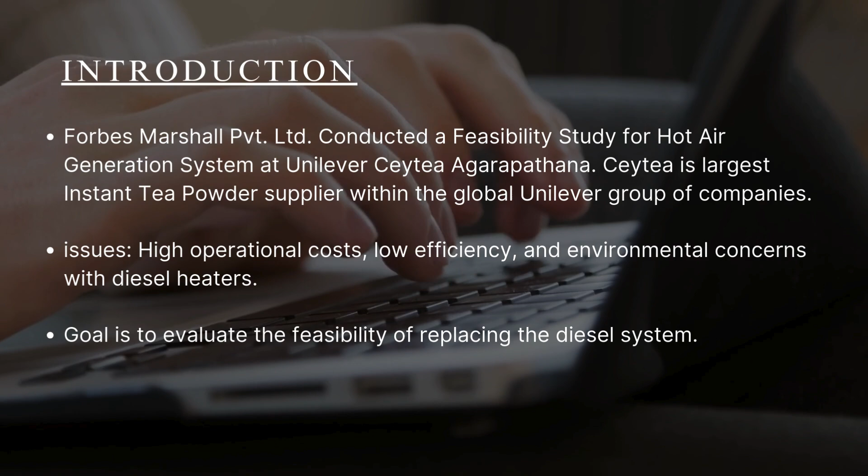to Drink, and Brisk. While their production processes are highly efficient, we have identified a major challenge in the heating system: their reliance on diesel-fired heaters. The problems with diesel-fired heaters include high operational costs due to the increasing price of diesel, inefficiencies in energy use leading to unnecessary waste, and environmental concerns, as burning diesel contributes to carbon emissions.

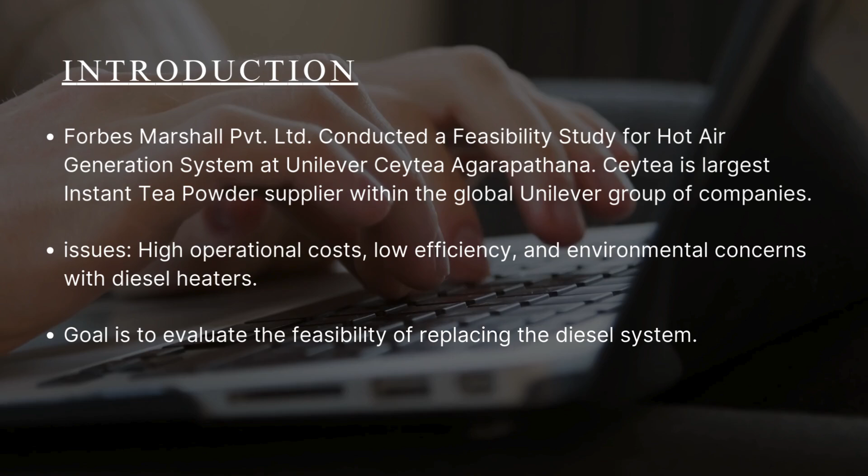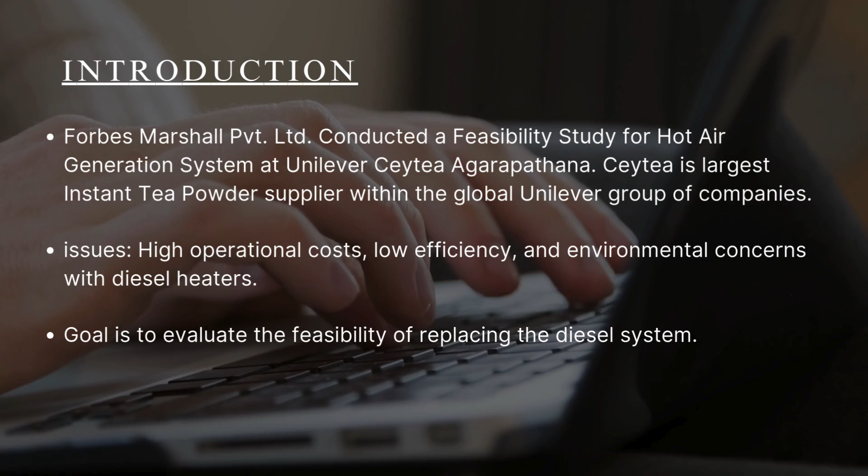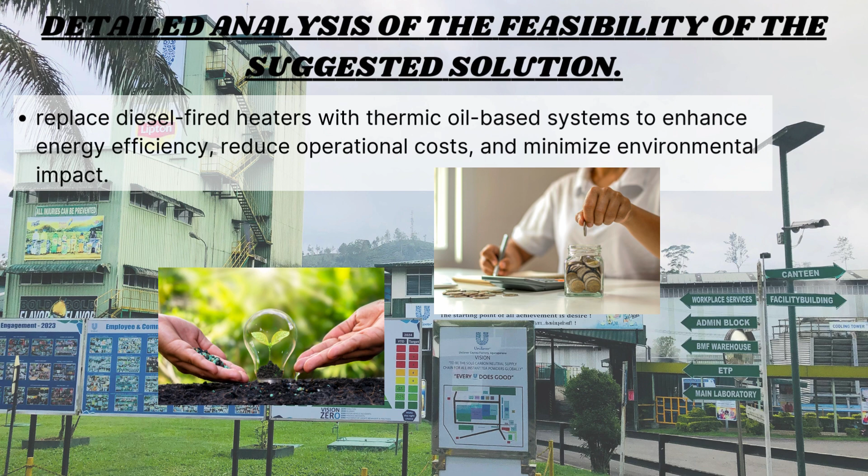To address these issues, our team conducted a detailed feasibility study to assess the potential of thermic oil-based heating systems. This alternative aims to enhance energy efficiency, lower cost and minimize environmental impact. Our first step was to analyze the existing system. We found that the plant consumes 1,830 liters of diesel per day, which is a significant expense. The current air heating system experienced a 6 Celsius temperature loss due to poor insulation in ducting.

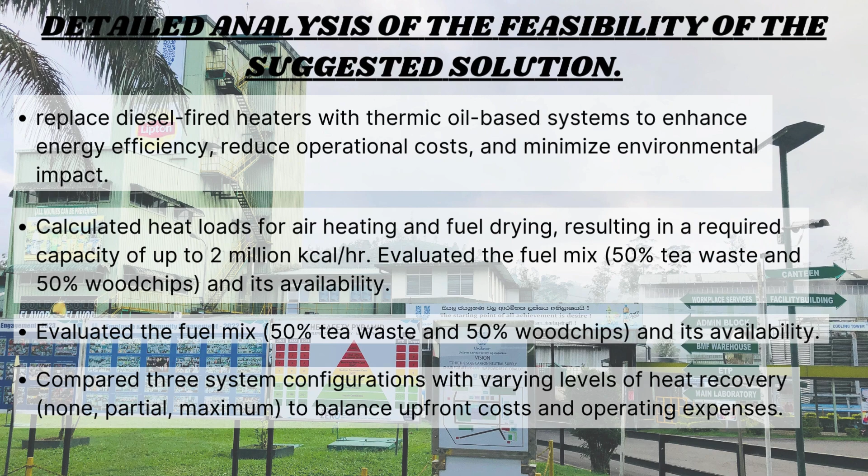Given these challenges, we explored whether thermic oil-based heating systems could provide a cost-effective and sustainable alternative. After conducting thorough research, we determined the required heating capacity. The heating demand for air heating and fuel drying is up to 2 million kilocalories per hour. The system can operate efficiently with a fuel mix of 50% tea waste and 50% wood chips, making use of byproducts from the plant.

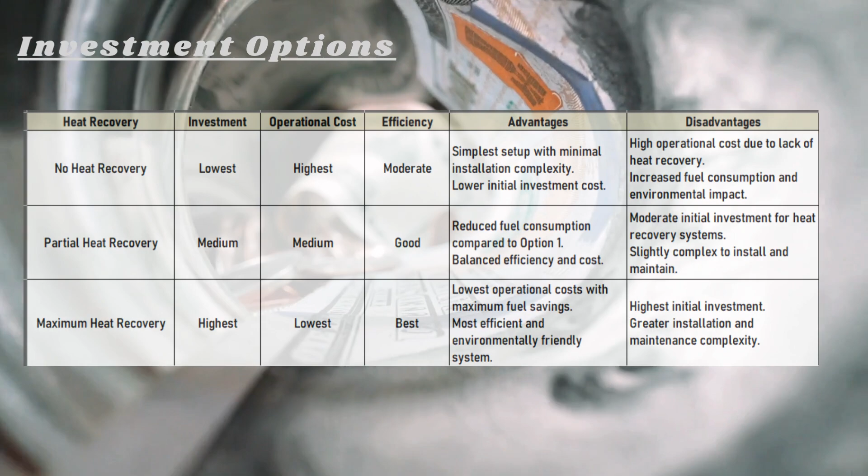In our study, we evaluated 3 different configurations for implementing the new heating system. Option 1 is no heat recovery. All heat for fuel drying and hot air generation is directly supplied by the thermic oil heater. A simple setup with lower installation complexity is an advantage, and the disadvantages are higher operation costs due to increased fuel consumption as well as the greater environmental impact.

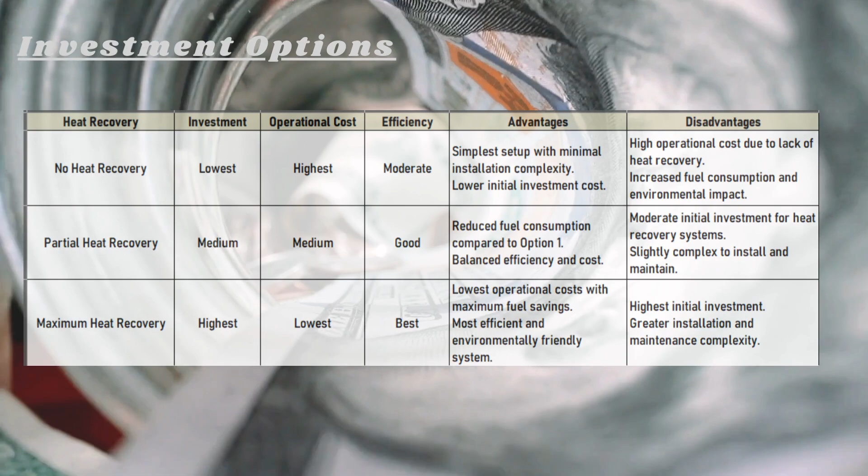The second option is partial heat recovery. Heat is recovered from thermic fluid exhaust gases to generate hot water for fuel drying. Reduced fuel consumption, lower operational cost, and improved overall system efficiency are the advantages, and the disadvantages are that it requires a moderate initial investment and slightly more complex installation and maintenance.

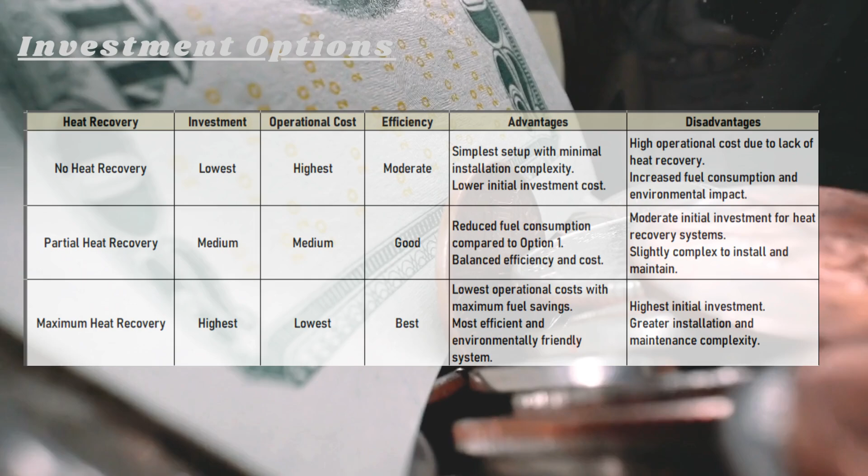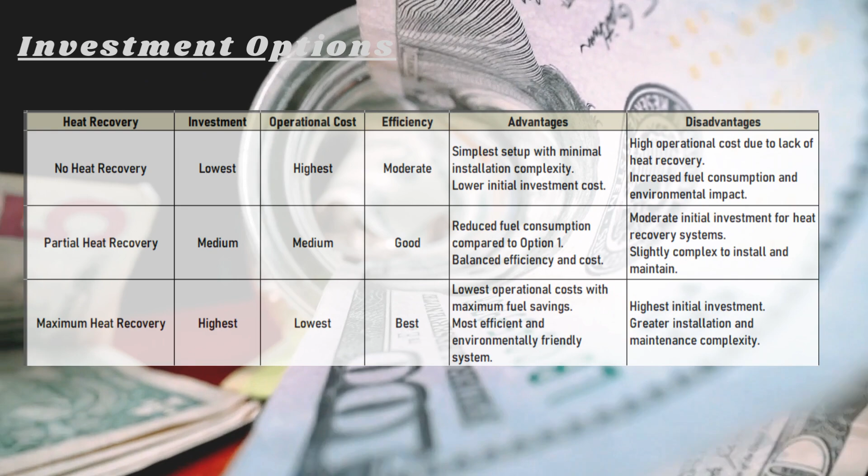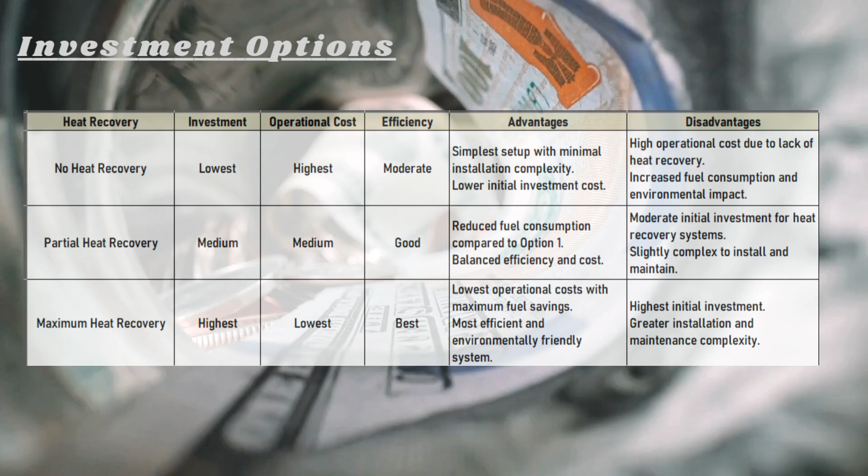The last option is maximum heat recovery. Implement full heat recovery from thermic fluid exhaust gases, maximizing energy savings. Lowest long-term operational costs due to maximum fuel savings, and the most efficient system with a significantly reduced environmental impact are the advantages, and the disadvantages are the highest initial investment due to advanced heat recovery and system enhancement, and greater complexity in installation and operation.

When we talk about the knowledge gaps relevant to the problem, during our study we identified several critical gaps that need to be addressed to ensure a smooth transition. The first one is diesel consumption data. Our study confirmed that diesel consumption is 1,830 liters per day, but additional analysis is needed on specific cost-saving opportunities. The second one is heat loss reduction. The 6 Celsius temperature loss in the current system requires better insulation to improve the efficiency.

And the third one is environmental impact. While we anticipate lower CO2 emissions, we need quantifiable data on carbon savings. And the last one is air pressure requirements. More information is required on air pressure needs for both the heater inlet and spray dryer inlet. Addressing these gaps will help us fine-tune the new system for maximum efficiency and savings.

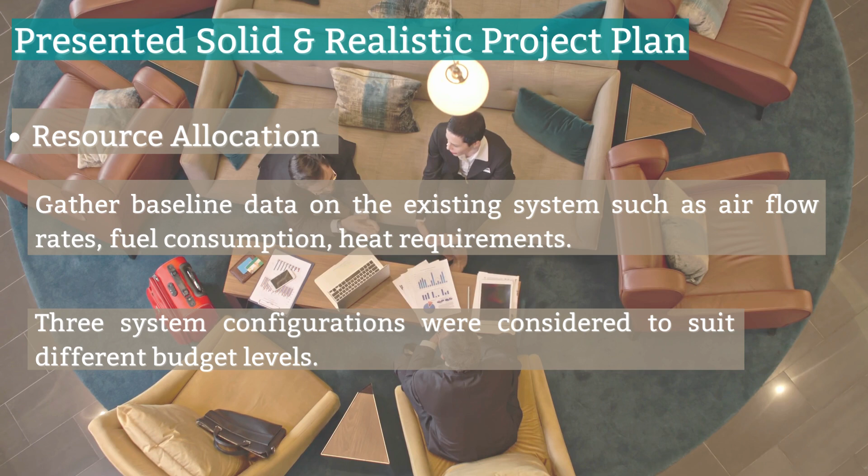When we talk about the presented solid and realistic project plan: gather baseline data on the existing system, for example, calculate airflow rates, fuel consumption, and heat requirements. Log operational parameters such as current temperature profile and fuel efficiencies, and determine the theoretical and practical heat requirements of air heaters and the fuel drying process, as well as choose a suitable heater capacity based on heat loads and expected losses.

Under the adapted innovative methods, I am mainly focusing on these points. The first one is advanced heat recovery systems. Design options for recovering heat from the thermic fluid exhaust, significantly improving system efficiency. And the second one is fuel optimization. Proposed a sustainable fuel mix of tea waste and wood chips, utilizing plant byproducts to lower operational costs.

And the other one is custom thermic oil heater design. Tailored the heater to the plant's specific requirements to ensure compatibility and efficiency. And the last one is energy conservation focus. Introduce the use of advanced thermic fluid for better heat transfer and reduced losses.

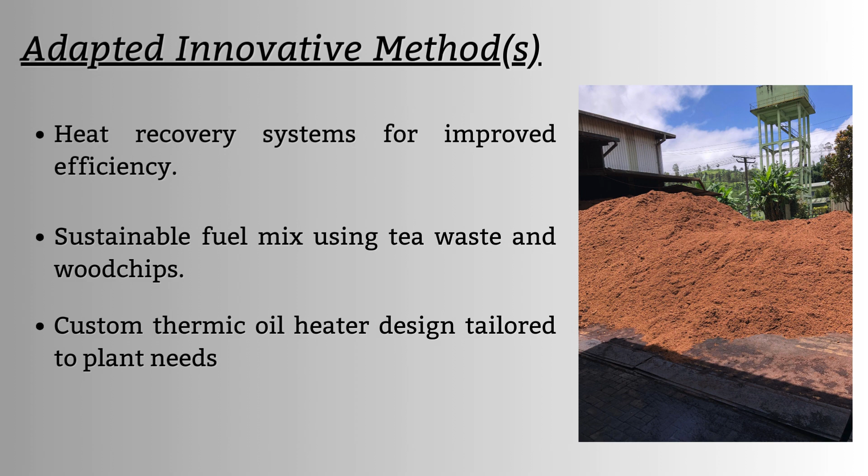So we are coming to the end of this video. For the final one, we are going to talk about delivered within allocated time with a good narration. I am going to explain this topic under 3 main subtopics. The first one is timely execution, the second one is clear and effective communication, and the last one is value of good narration. Under timely execution, the feasibility study was conducted within the planned timeline, ensuring that data collection, analysis, and report preparation were completed without delays.

A clear and well-structured report with detailed findings and recommendations was provided promptly to ensure further decision making. And also, all tasks such as heat load calculations, techno-commercial comparisons, and investment evaluations were completed as planned, meeting stakeholders' expectations. And the second one is clear and effective communication.

Effective communication with the plant team ensured alignment on objectives and data requirements before the study began. The final presentation invited discussion and feedback, ensuring stakeholders fully understood the recommendations and next steps. The final one is value of good narration. The report and presentation clearly conveyed complex technical data like heat loss calculations and investment comparisons in a simple and understandable manner. This is all about my project.